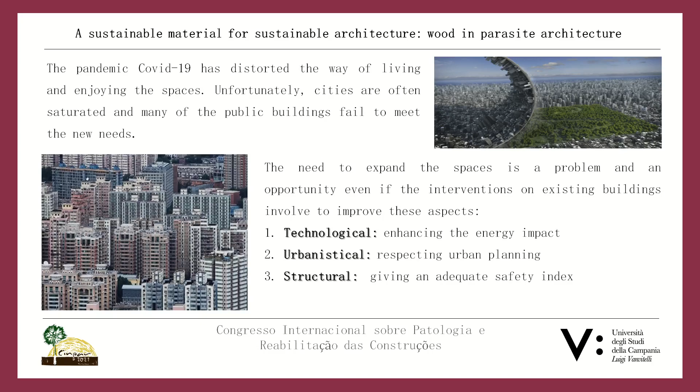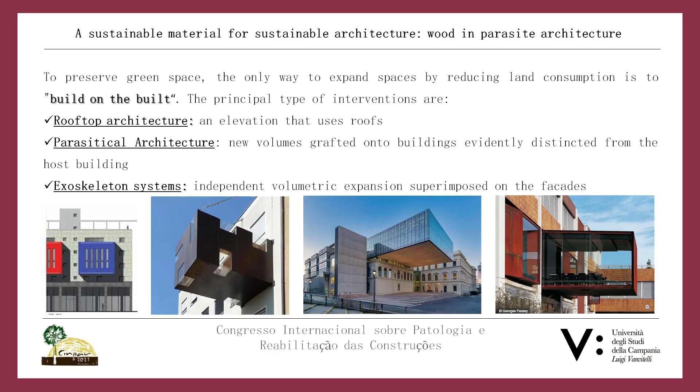To answer the growing need for usable spaces, we need to expand anthropized areas. To reach this target by reducing land consumption and preserving green space, the only way is to build on the built. So the principal types of interventions are rooftop architecture, where new volumes are elevations that use roofs; parasitical architecture, where new volumes are grafted onto buildings and are evidently distinct from the host structure; and finally exoskeleton systems, that are independent volumetric expansions superimposed on the facades.

From a typological point of view, we consider four layouts, three of which involve the building envelope. In the first type, the parasite volume is put on the building to create new levels. In the second type, the new volume is clearly distinct from the host structure. In this case, we could have independent foundations. The third typology concerns a new volume that extends beyond the building envelope. And in the last type, the court area is used to enlarge usable surfaces.

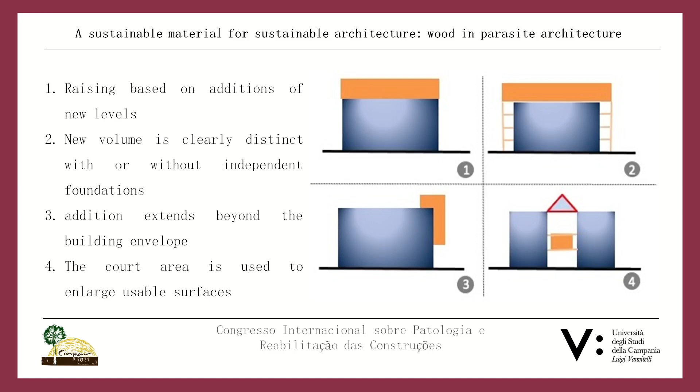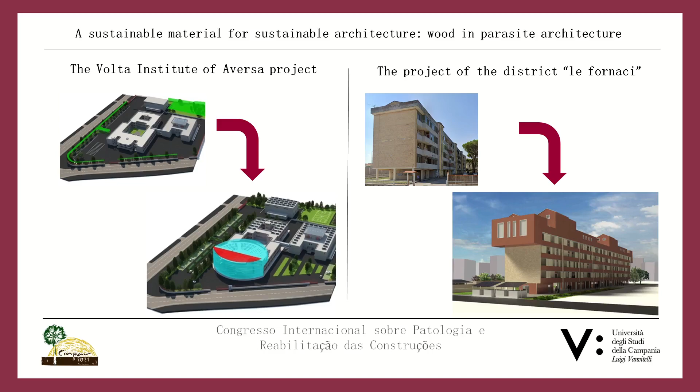In this slide, we can see two examples of parasitical architecture that regard the enlargement of a school in Aversa and the expansion of a densely populated residential building in Santa Maria Capua Vetere. The volumetric additions can produce virtuous effects such as energy efficiency, creation of new living spaces, social services and common areas without further land consumption.

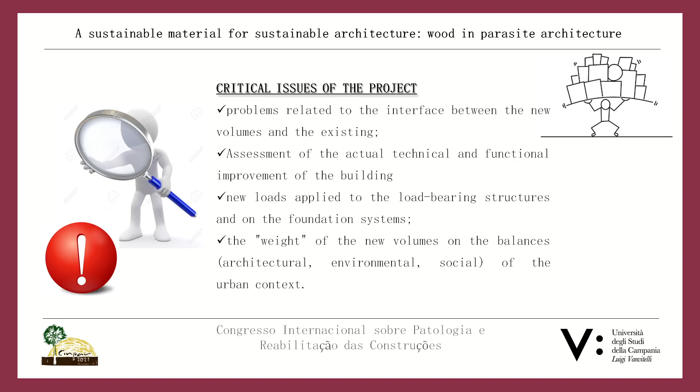These benefits should be verified in function of some important aspects like in-depth studies of the interface between the new volumes and the existing ones, the assessment of the actual technical and functional improvement of the building, structural verification related to new loads applied to the load-bearing structures and on the foundation systems, the analysis of the weight of the new volumes and the balances of the urban context from the architectural, environmental, and social point of view.

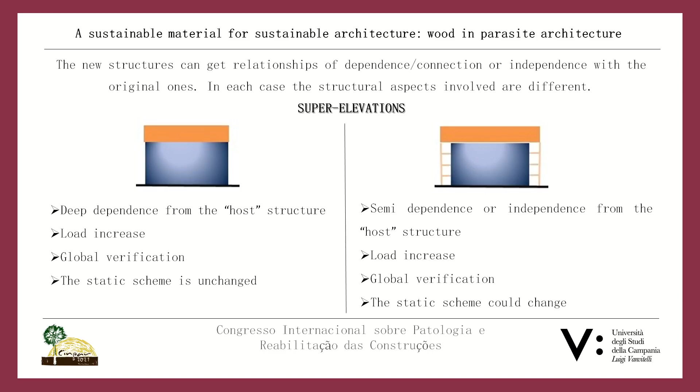New volumes can have a dependence or independence relationship with the host structure. In each case, the structural aspects involved are different. The superelevation addition can be realized by the first and second typology explained in the previous slide. In the first case, we have a total dependence on the host structure. That determines the need for a global verification even if the static scheme could be unchanged, except for the dimensions of the load-bearing elements. In the second case, we can have either a dependence or independence relationship. In both cases, like for the first typology, there is the need for a global verification, also by reason of probable static scheme variation.

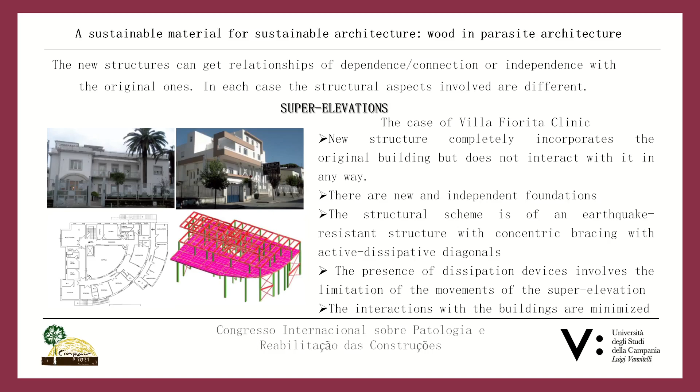In this slide, we can see an example of a superelevation with an independent relationship with the host structure. The case of Villa Fiorita Clinic concerns a volume addition with new foundations that bear a new deck superimposed on the roof without interaction with it. The new structures present an earthquake-resistant scheme with concentric braces with active-dissipative diagonals. This is a typical case where the addition actively collaborates in the dissipation of the seismic force, improving the original building features.

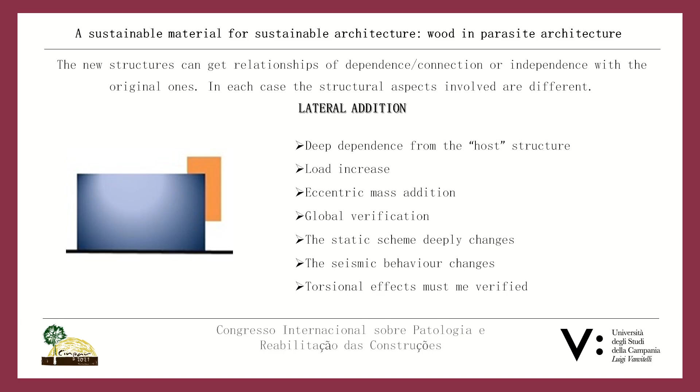The type that concerns lateral addition has to be deeply analyzed because it creates a profound dependence on the host structure. So, many structural issues have to be checked. The addition represents an eccentric mass that modifies the static schemes and the seismic behavior of the whole structural system. Also, the effects of torsion have to be verified. Load increase has to be checked. Finally, the lateral addition superimposed on the facades represents an important appearance modification. The formal aspects of the original buildings are distorted, giving birth to a new building. In the facades facing the courtyard, the formal modification is substantially hidden, so the principal facade's appearance is unchanged.

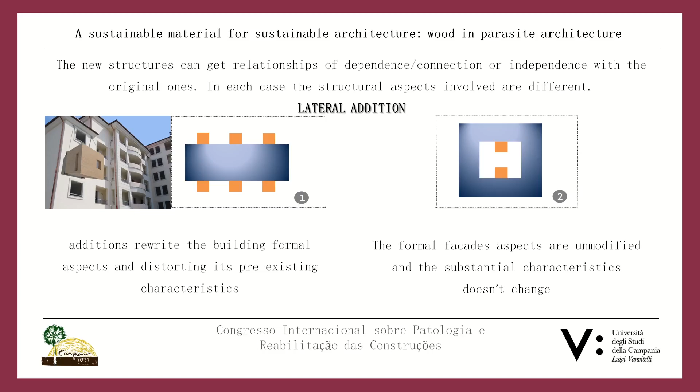Sometimes the new volumes actively collaborate in the improvement of structural performances. In this slide, we can see how the full typological addition in the courtyard of L and C-shaped buildings can limit torsional effects due to the horizontal seismic forces. Also in the adaptive exoskeleton structures, we can entrust to the new structures the task of earthquake-resistant elements.

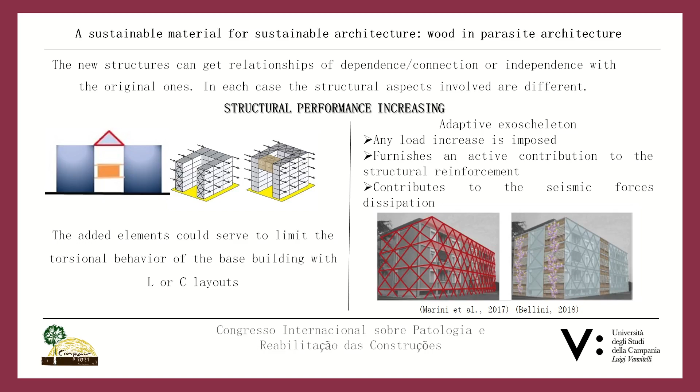Parasitical architecture allows the realization of volumetric addition without soil consumption. Also, almost totally off-site technology is the most suitable for its realization. The goal is the creation of high-performance buildings that are smart, sustainable, and capable of adapting to events and changes to which the urbanized areas will be subject. From this point of view, the use of wood and the products derived from it can represent a valid solution. Wooden parasitical architecture fully fits within the perspective of resilient thinking.

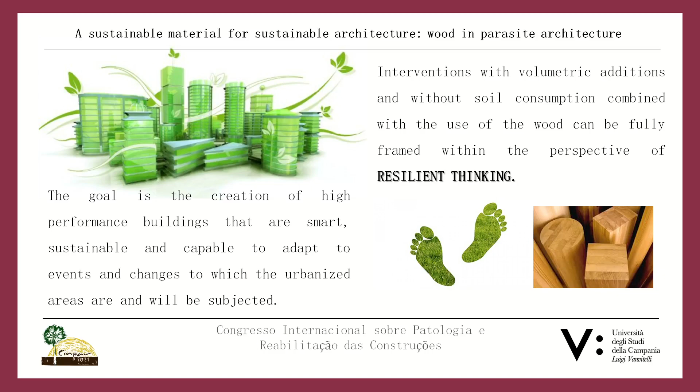Modern research and technological innovations have allowed us to overcome the problems related to the anisotropy of wood in its original configuration. A new generation of wood-derived products and technologies has been made that fully compete with the most commonly used materials for construction. In order to create the smartest sustainable buildings, CLT, glulam, and Pres-Lam technology seem fitting for this purpose. The Pres-Lam system was created in response to the growing demand for seismic resilient and sustainable structures. The innovation lies in applying the concept of prestressing to prefabricated wooden elements such as glulam and CLT. This happens by creating a post-tensioning system on site through the use of sliding cables and tensioning equipment.

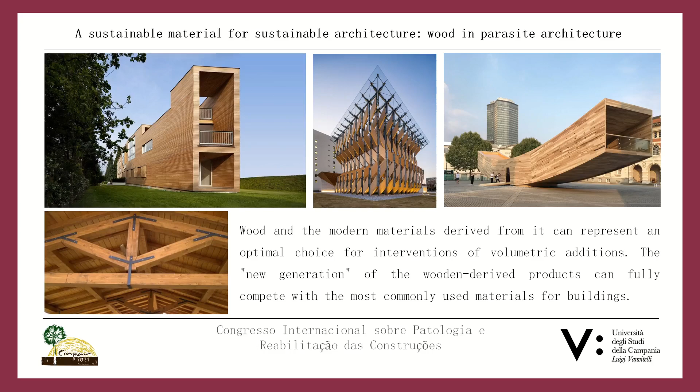Several studies have been conducted to analyze the recentering and dissipative characteristics of structures made with this technology, as well as the dissipative effects due to the insertion of rocking elements inside existing structures to be entrusted with the mitigation of damage, or due to the presence of metal connections for in-plane or out-of-plane reinforcement interventions with CLT panels. The prefabrication makes the proposed solution advantageous in terms of optimization. The faster installation and the use of elements substantially executed off-site allow us to precisely establish the times and areas involved in the construction and assembly phase. That could ensure the continuation of the activities in the original building if necessary.

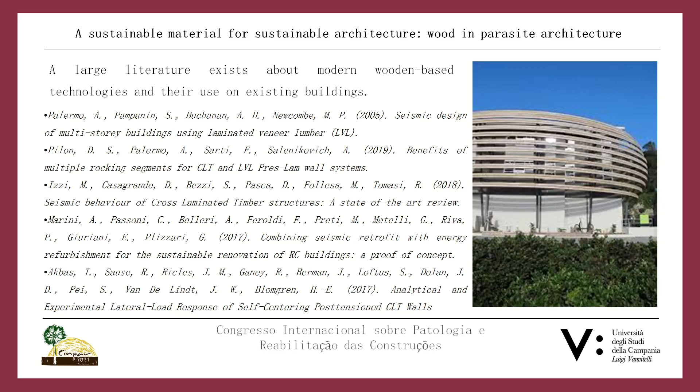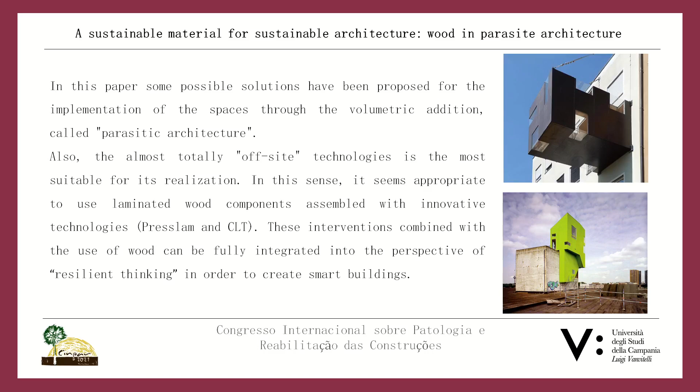In this paper, some possible solutions have been proposed for the implementation of the spaces through the volumetric addition called parasitic architecture. Also, almost totally off-site technology is the most suitable for its realization. In this sense, it seems appropriate to use laminated wood components assembled with innovative technologies. These interventions, combined with the use of wood, can be fully integrated into the perspective of resilient thinking in order to create smart and sustainable buildings. Thanks for your attention.